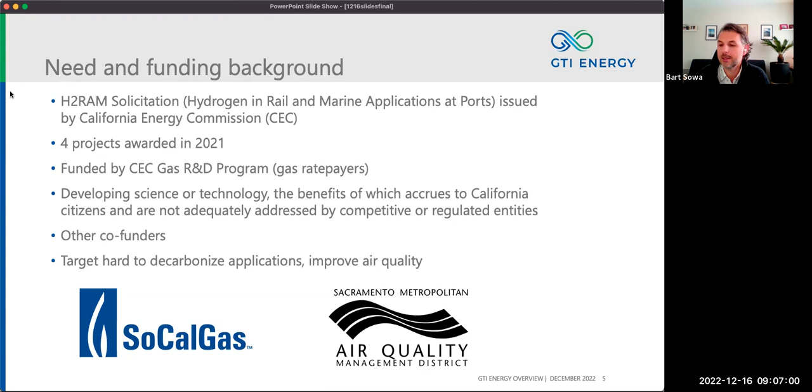As I said, the project was awarded in 2021. We expect to wrap it up in 2025. We have a strong team of experts and partners.

We have Sierra Northern Railway that will be building and operating the locomotive and testing the locomotive. Frontier Energy will be assisting with hydrogen safety and training aspects. UC Riverside will be collecting and analyzing data and life cycle analysis. Valley Vision is coordinating all of the communication and outreach efforts.

Then we have our technology partners: Ballard providing fuel cells, Rail Power Tech providing software controls and electrical system integrations, OptiFuel providing mechanical system and subsystem integrations including energy storage, and Velocity Strategies, who is the fearless project manager here, with Michael Faust representing Velocity Strategies.

Just a quick introduction to GTI, so everybody knows why we're here. GTI Energy is a research and training organization focused on developing, scaling, and deploying energy transition solutions. We leverage the expertise of our scientists, engineers, and partners to deliver innovations needed for low carbon, low cost energy systems. We've been doing this since 1941, working across the whole energy value chain. Our mission is to make energy systems safer, cleaner, more efficient, and more affordable. I think we all want our energy to be just that: cheap, clean, and safe.

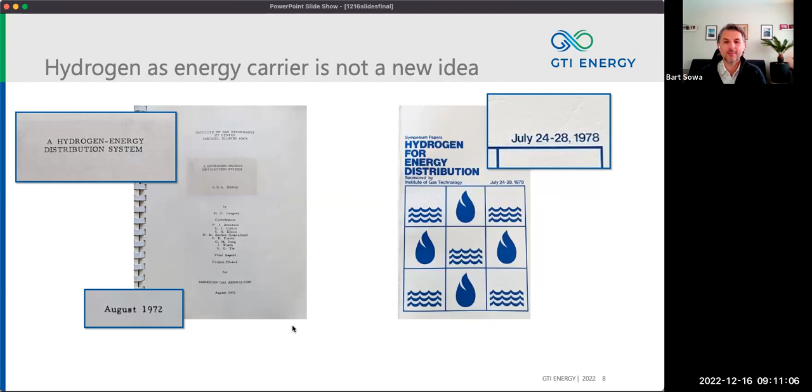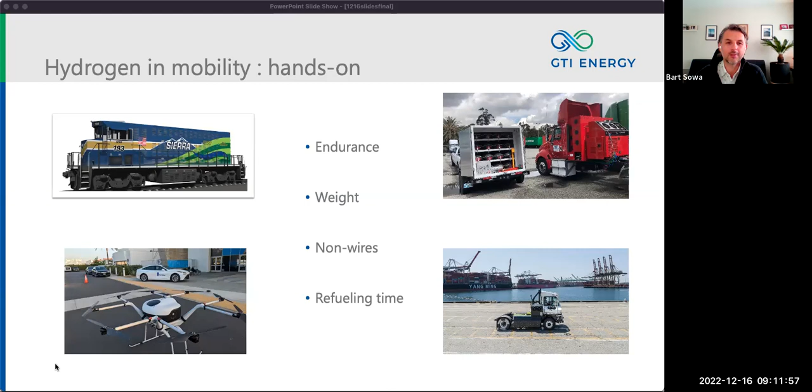That's about as much time as I want to take from the team. Thank you again for joining us. I'll be happy to answer questions at the end of the webinar, and I'll hand it back to Grace.

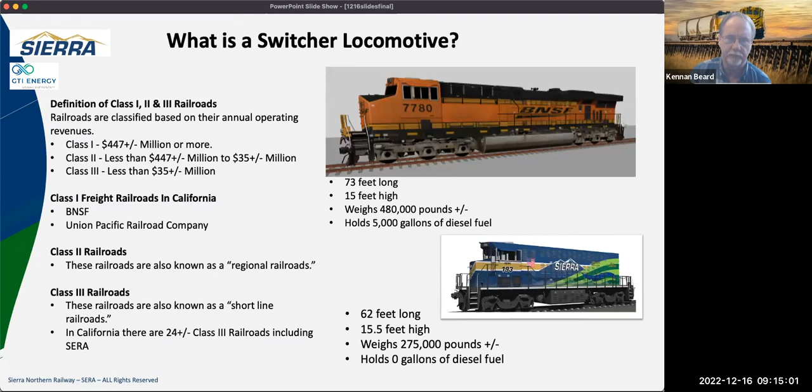As I mentioned, we are a freight operating railroad. The Sierra line has operated in California since 1897. That would be our Oakdale line that operates up to the Gold Country. Short lines are considered to be the first mile/last mile of freight hauling. So again, we don't haul across the country, but we're the ones that serve the direct customers, switching the cars in and out of the transload facilities, the warehouses, the yards.

We at Sierra work in conjunction with 2 Class 1 partners, the BNSF and the UP. I operate 3 railroads right now, one in the Port of West Sacramento, one in Oakdale, and one in Southern California. Between those 3, we have over 41 switcher locomotives in our fleet. They're currently a combination of older technology, EMD type units, as well as gensets, and now we're starting on this new hydrogen hybrid fuel cell locomotive.

The name Sierra Northern was a combination of joining the Sierra Railroad Company and the Yolo Shortline in 2003. So while the Sierra Northern Railway name's only been around since 2003, the Sierra name has been around since 1897. We operate 160 miles of track, well over 160, through the prime industrial and agricultural areas through Central California. If anybody's looking us up, our alphanumeric code is SERA for Sierra Railroad.

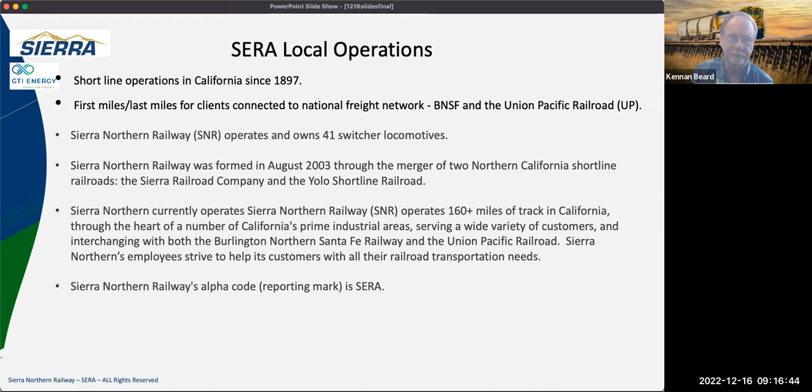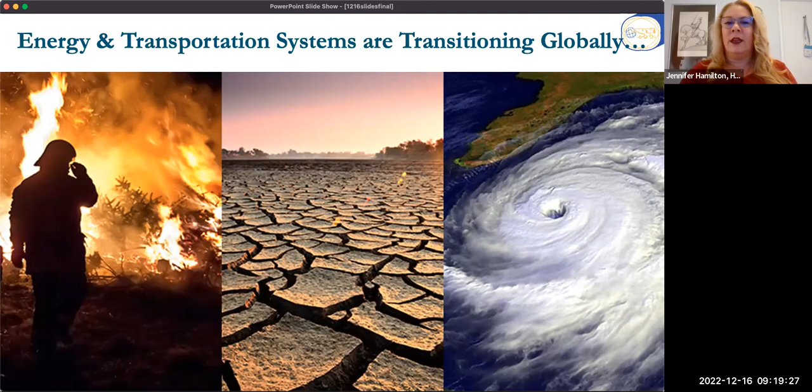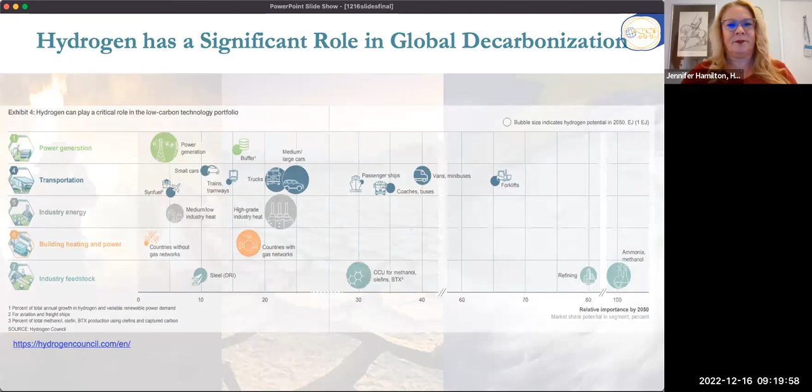In California, hydrogen fuel cell passenger vehicles are available. People are driving them. I do drive a Toyota Mirai myself.

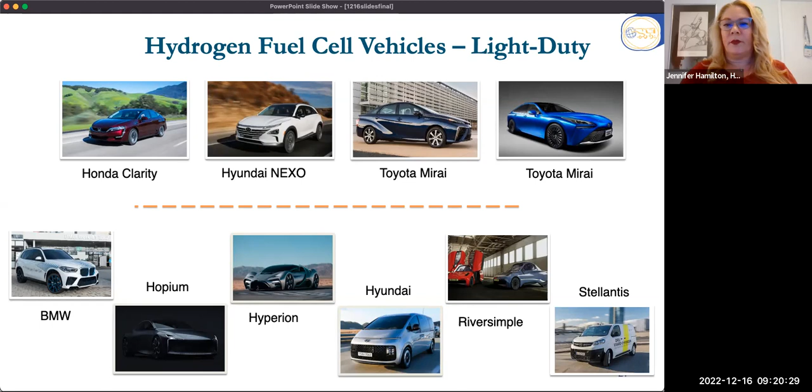So the vehicles across the top are what we see in California. We're currently around 14,500 vehicles in California. A drop in the bucket, but we expect that to grow as we hear the announcements and see new vehicles being announced, and those are the ones pictured below. So we do expect those numbers to keep growing.

In addition, we've also had hydrogen fuel cell transit buses in fleets operating in California for many years, and there's a list of transit agencies who are planning hydrogen fuel cell buses for their fleets. There's a lot of great data in that.

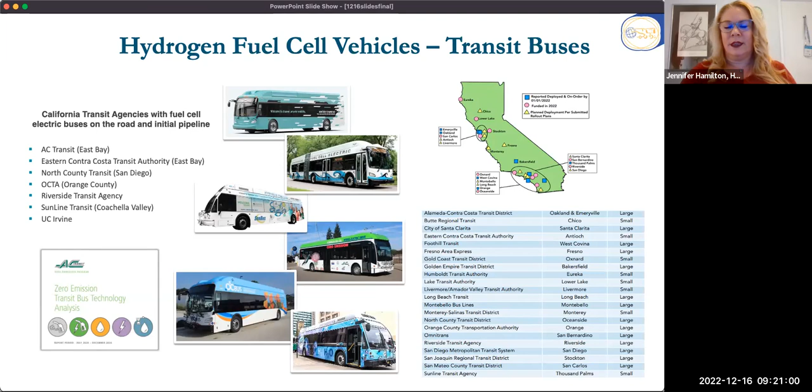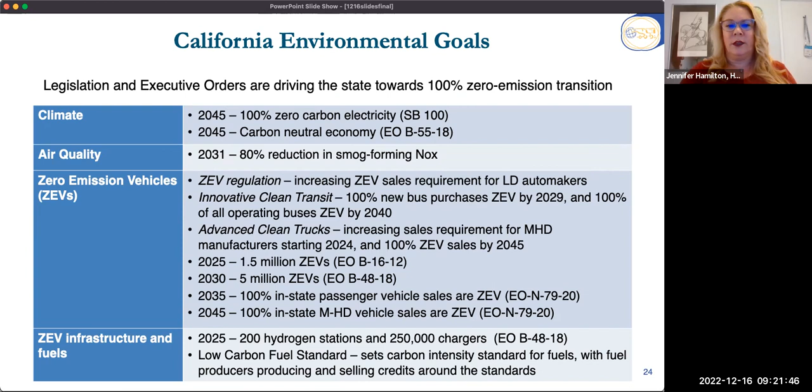In California, we have led the way in emissions reduction and overall air quality. And so in meeting those targets and getting to our 100% zero emissions, we do need to have both hydrogen fuel cell and battery technology. This is really key and is something that our partners at the state agencies also recognize.

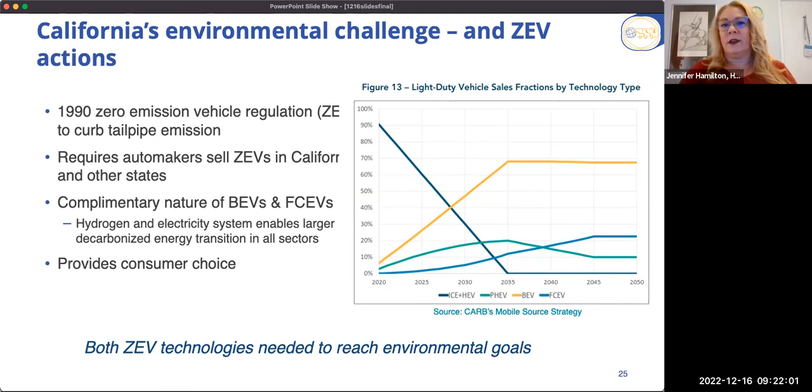We do have a light duty hydrogen fueling market. It is a nascent market, and we are working toward that 200 station goal. The Fuel Cell Partnership did publish a document in 2018 with a target or milestone of 1,000 stations to support upwards of 1 million light duty fuel cell vehicles, which we still want to see. But we are working toward that 200 station goal currently.

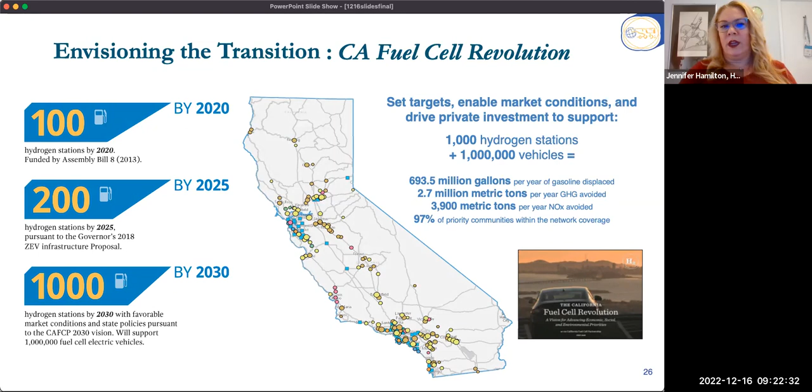Our partners at the state have published a self-sufficiency study, which reports that with relatively a small amount of additional funding, we can reach a point where we are self-sustainable and the market takes over. That's another thing our vision document points out as well, sort of where the market takes over and what we need to get there. Both documents can be found on our website.

More recently, we published a fuel cell truck vision document, which puts out another milestone of 200 stations for 70,000 trucks, but realizing those trucks, as well as trains, don't necessarily stop at the California border. The switch locomotive, of course, is local, but if we're talking about rail applications across the board, those don't stop. So with this heavy duty truck vision, we started thinking more about moving outside the borders of California, and we are working on a mobility plan.

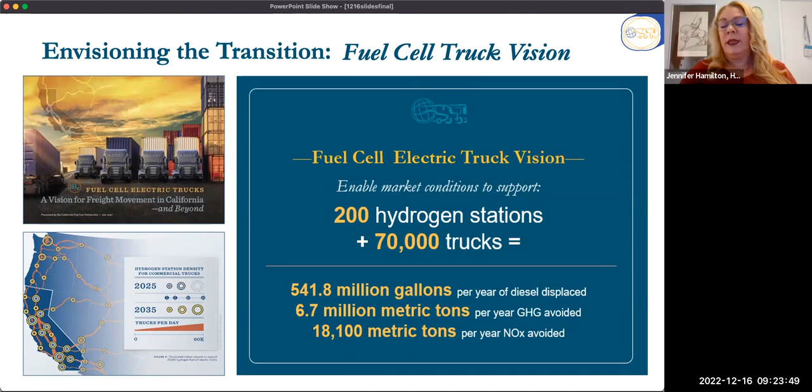This leads into the work we're doing with the ARCHES Consortium, the California Consortium for putting together the California submission for the DOE Hydrogen Hubs submission. Connecting those, our mobility plan would work towards connecting those hubs and really bringing together and uniting around the country based on heavy duty and filling in with the light duty. So that's a quick big picture of all the activity happening in hydrogen. As Bart mentioned, there's so much happening right now and we're really excited.

Let me move on quickly to the next set of slides, and we'll talk a bit about the properties of hydrogen and some high level safety. I realize I'm moving quickly, there's a lot of information to share on these slides, and of course I'm happy to answer any questions.

Hydrogen has been around, as you saw from Bart's slide too, for a lot of years. It's been used in industrial processes for many decades with a pretty good safety record. There's diverse sources of hydrogen as well as diverse applications. As you saw just within transportation, there's a wide variety, but there's also stationary, backup power, all kinds of things. So suffice it to say, there's many ways to make and use hydrogen, and getting towards that carbon-free pathway is what everybody is headed towards.

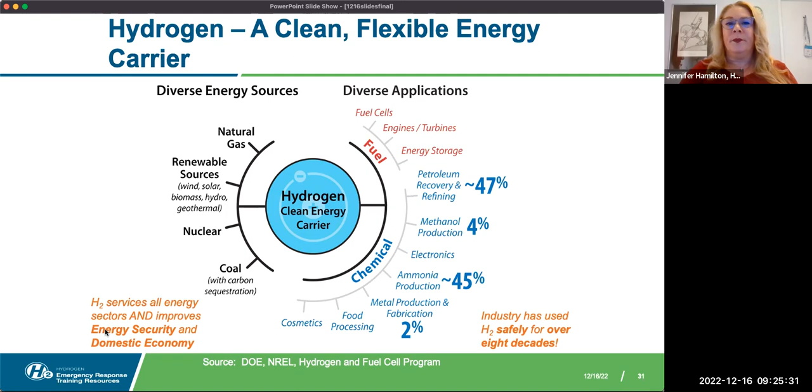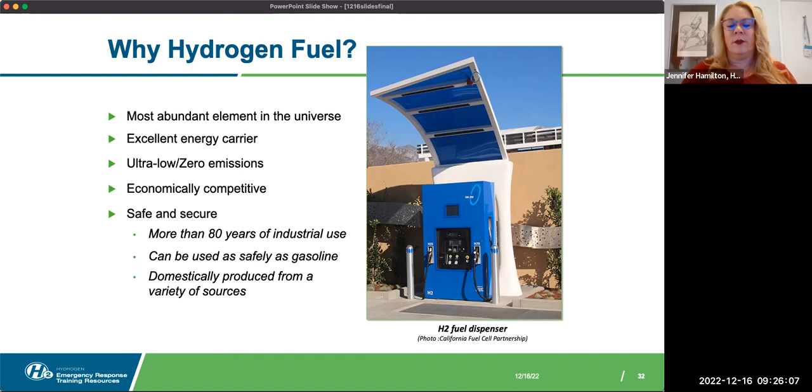So why are we using hydrogen as a fuel? Hydrogen's been around and used for a long time. What's relatively new is putting it into vehicles and using it in the transportation sector. It is an energy carrier, and it is zero emission at the point of use. We'll see in a moment how a fuel cell works. There are advantages to using hydrogen in transportation, getting that zero emission and low carbon, meeting the goals that we need to.

Just a quick list of some of the ways hydrogen has been used historically. Again, what's new is putting it into vehicles. Actually, one of the biggest uses of hydrogen is in refining the fuel we currently use.

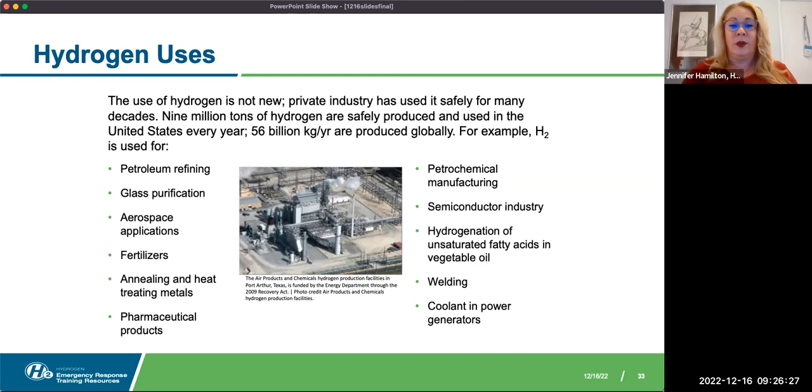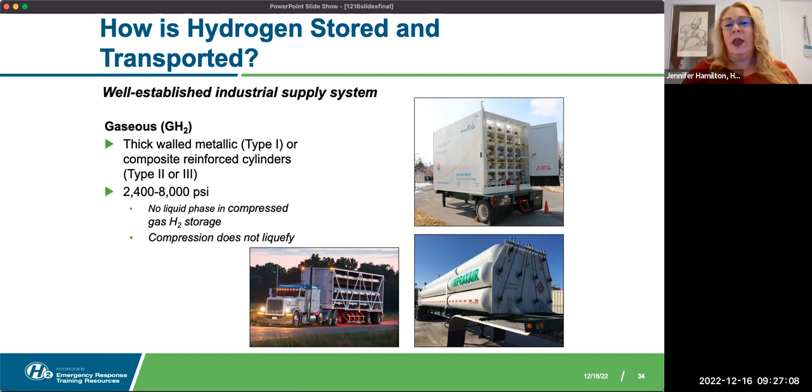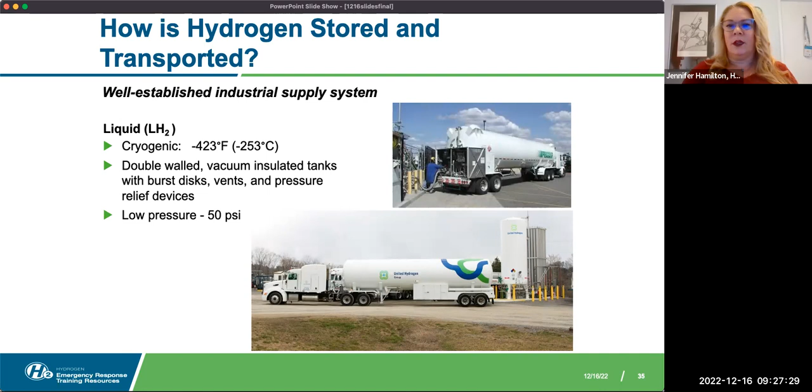It can also be transported as a liquid. It can also be stored as both a gas or a liquid at the point of use at the station. When hydrogen is liquefied, it is a cryogen, meaning it must be at very cold temperatures to be liquid. Again, this is common industrial practice. It's been done for decades.

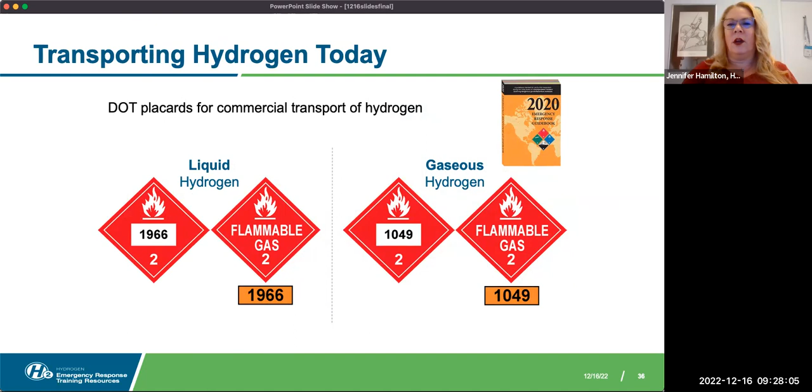Part of my job with the Fuel Cell Partnership historically has been doing outreach and education for our first responder community. We'd like to point out that because hydrogen is an industrial commodity, it has been used for many years. That is included in a standard book reissued every few years from the Department of Transportation, the Emergency Response Guide. This is the placarding found on transport trailers for both liquid and gaseous hydrogen.

Hydrogen exists as a gas at ambient conditions, and it is very light, 14 times lighter than air. For it to be liquid, it has to be brought to very cold temperatures. When we talk about dispensing and selling hydrogen for vehicles, we refer to it by the kilogram, but you can think of a kilogram of hydrogen sort of like a gallon of gasoline, because if you were to burn a gallon of gasoline and a kilogram of hydrogen, you'd get about the same energy output. So we can speak about those interchangeably.

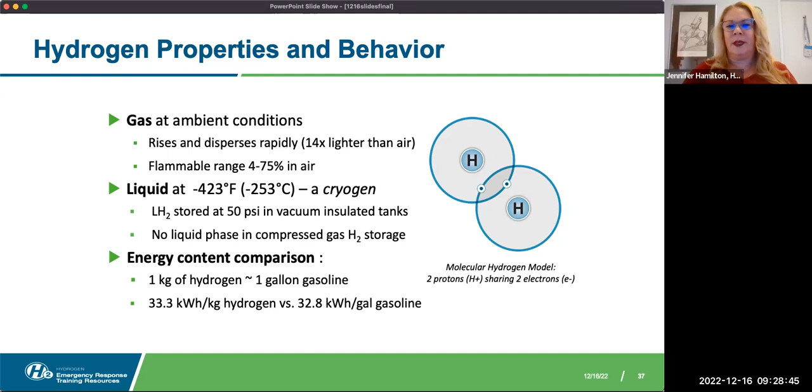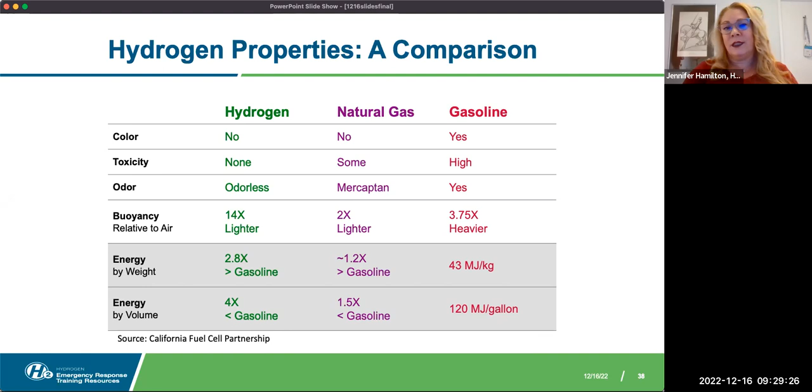Again, hydrogen is much lighter than air, 14 times lighter, which is a bit of an advantage. We don't want it to leak, we want to keep it where it belongs, but if it does leak, its tendency is to rise and dissipate. It's also colorless, odorless, and non-toxic, so we have other methods of detecting hydrogen should there be a leak, at very low levels, so that we can mitigate getting into a potentially dangerous situation. Hydrogen's a fuel, and like other fuels, it has certain properties we need to understand and design systems around so we can use the fuel safely.

We do have safety systems at existing fueling stations. We have around 53 retail stations right now operating in California, with 3 heavy duty stations for heavy duty trucks, and all of them have safety systems, such as everything around the pressure, the high pressure storage, as well as fire and leak detection.

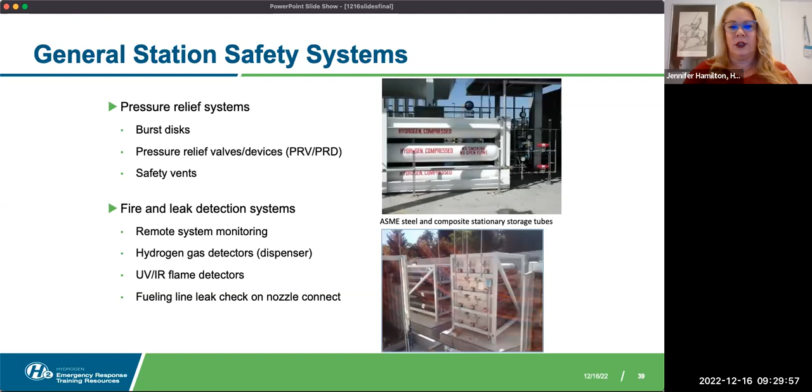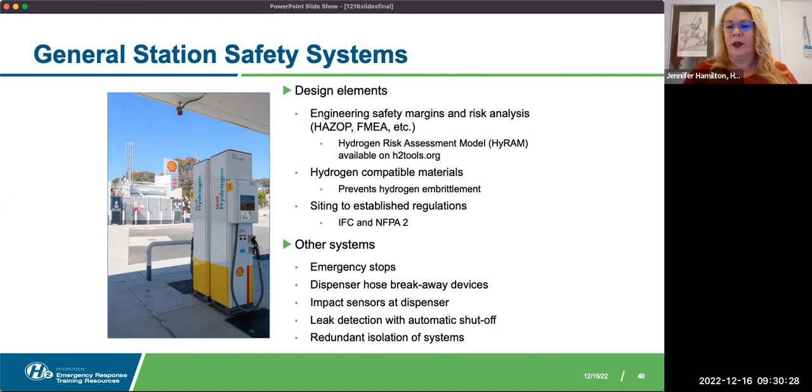These designs go through safety and risk analysis and are sited and installed according to current fire code and NFPA 2, the Hydrogen Technologies Code, which California adopts by reference into the California Fire Code. There are also systems you'd see at any everyday regular gasoline fueling station, such as e-stops and breakaway on the hose.

There's not one way to do a station, although some companies are settling into one design for their company. Hydrogen can be delivered to the station as a liquid or as gaseous hydrogen, as you saw in those slides of the delivery trailers. We also have a station in California that's off an existing refinery pipeline, so there's some existing pipeline, and you could also make hydrogen on site. So there's a little bit of variety in how a station can be designed.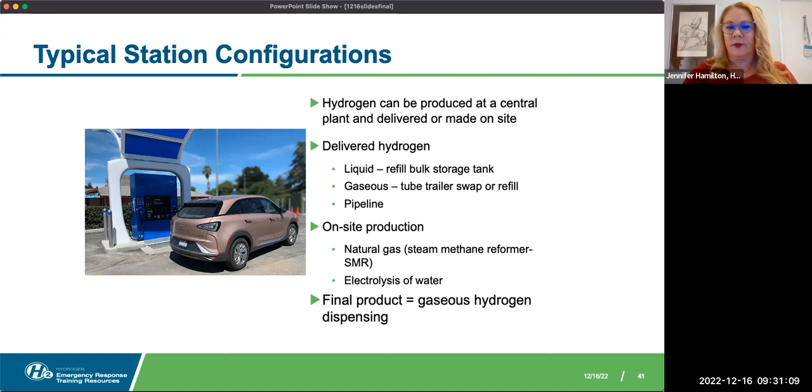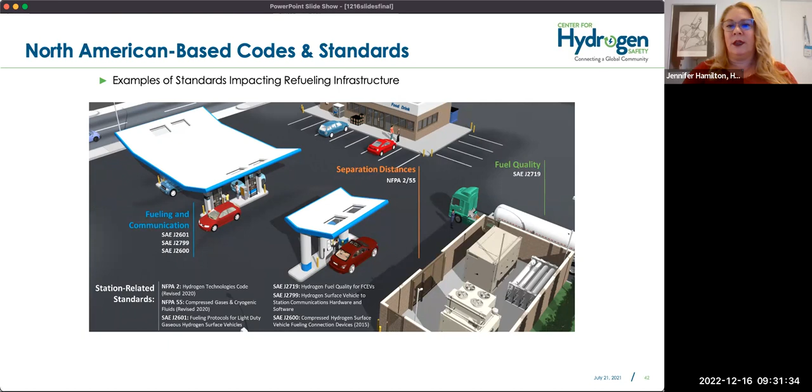Of course, there are applicable safety codes and standards that go into the design and installation of the station, as I mentioned, NFPA 2 for installation, things like fuel quality. We have a standardized fueling protocol for light duty vehicles, and that's being worked on currently for heavy duty, which could be expanded to other heavy duty applications, as well as various component standards around the station equipment and the vehicles.

This is a schematic of a light duty vehicle fueling. The dispenser is similar to what you would see, and so far that hasn't deviated from what I've seen for other applications. Things that might differ are the hardware in the fueling nozzle and connector, and the size of the storage cylinders on board a vehicle, but likely there's going to be a lot of similar components.

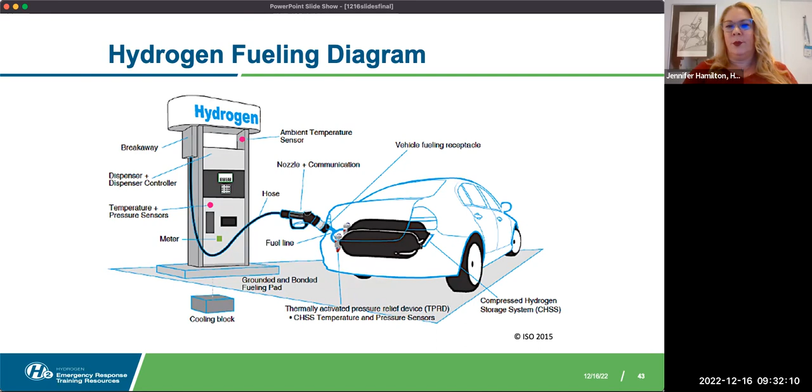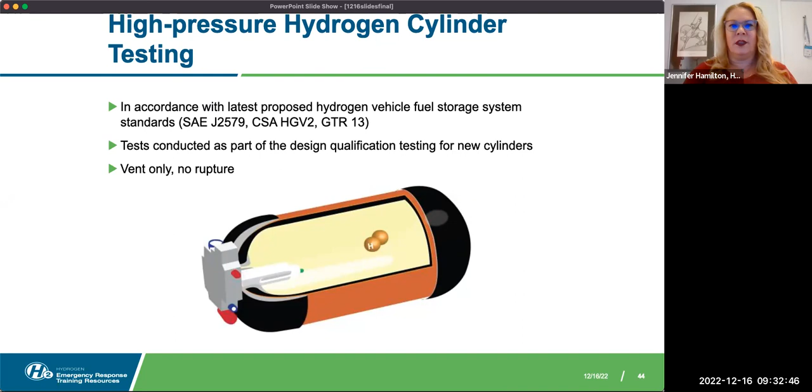Talking about on-vehicle storage, these are cylinders that are designed, manufactured, and tested to existing safety standards. They go through testing and receive a lifetime approval, usually in the 15 to 20 year range currently, and that's very rigorous testing. I sit on the codes and standards committees that develop these, and I can attest to the amount of thought, engineering, and resources that go into these codes and standards.

So quickly, what is the vehicle doing, regardless of what it is, with the hydrogen that gets put on board? It is using the hydrogen from those storage cylinders in a fuel cell stack. This is an example of a single fuel cell, composed of a positive and a negative electrode, with a membrane in between that will catalyze the separation of the hydrogen molecule into protons and electrons. The electrons generate the electrical current that powers the vehicle, and excess current gets put into the battery.

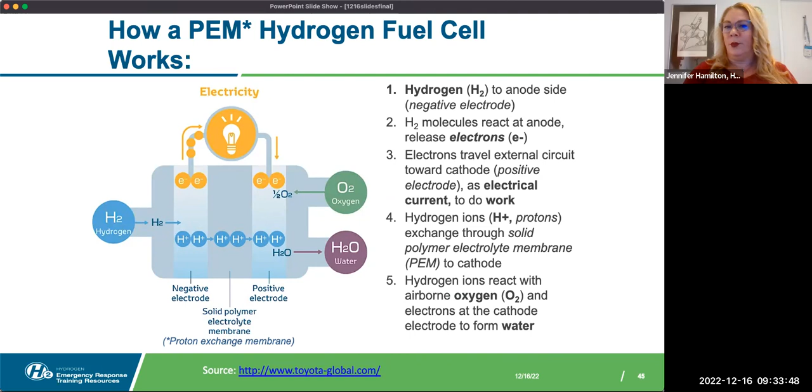The outcome of that electrochemical reaction is that the oxygen from the air used in the reaction and the hydrogen used from the onboard storage cylinders come back together on the other side, forming water as the byproduct. So again, zero emissions out the tailpipe. So that's the quick and dirty version.

Again, I'm open to questions. There's more information on these slides than I covered, but I want to give you some resources.

Of course, our website, h2fcp.org, has our station map and FAQs. You can see by the numbers where we are with vehicles and stations in California. And then the Center for Hydrogen Safety, of which we're a strategic partner, houses the hydrogen tools resource, as well as resources for first responders and others, lessons learned, best practices, and so forth.

And I think that's all I have for you. Thank you.

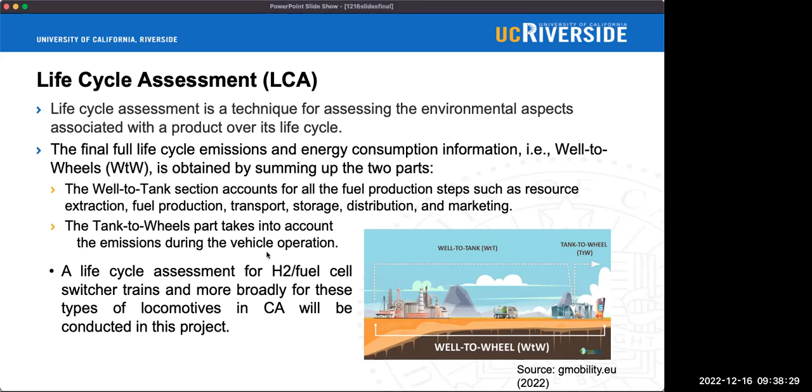So since this is a California-centric project, we will implement the California greenhouse gases, regulated emissions, and energy use in transportation, or GREET model. The GREET model, developed many years ago by Argonne National Lab, is a tool that examines the life cycle impacts of vehicle technologies, fuels, other types of products, and energy systems, and it's widely used across the US.

Essentially, for any given energy and vehicle system, GREET can calculate total energy consumption, emissions of air pollutants, greenhouse gases, and water consumption. So we will be using the California GREET version 3.0 model, which is the latest version, released in 2018, and is used to generate the carbon intensities of all different fuel pathways.

For the purpose of this work, the well-to-tank analysis will be focusing on the hydrogen production methods and distribution, while the tank-to-wheels analysis will be using locomotive activity data that will be collected by UCR, such as data related to the locomotive operation and mileage traveled, etc.

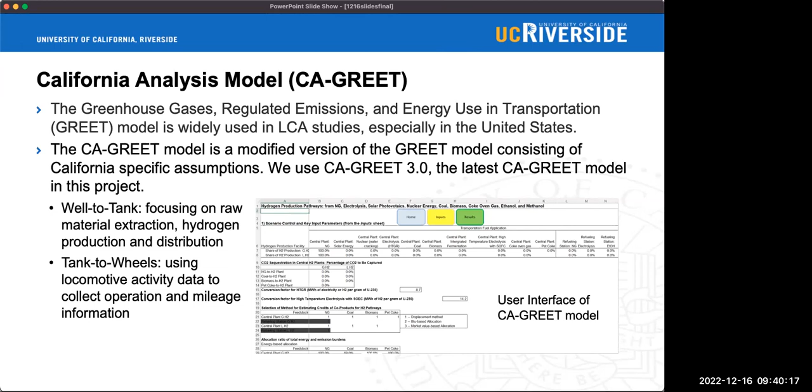This, I think I have one more. That might be all the slides that we have. Oh, okay, I had one more, but it's fine. It's fine. Thank you so much. Thank you.

All right, well now I will head over and talk about the public health impacts and improvements of hydrogen. So you all heard the various applications for hydrogen, and I'm excited to share more about the public health improvements that are going to be happening as a result of this project.

So what is diesel exhaust? Diesel exhaust is made up of particulate matter and various gases, and actually includes over 40 substances that are listed by the US EPA as harmful and hazardous air pollutants. We're excited that this project will be replacing 10,000 gallons of fuel that are used each year to run this switcher locomotive.

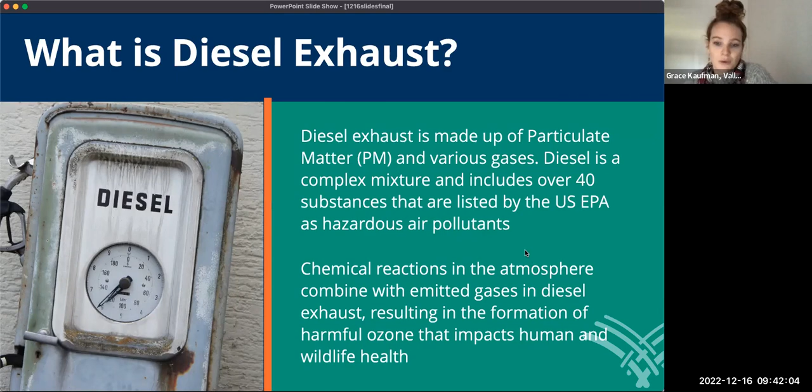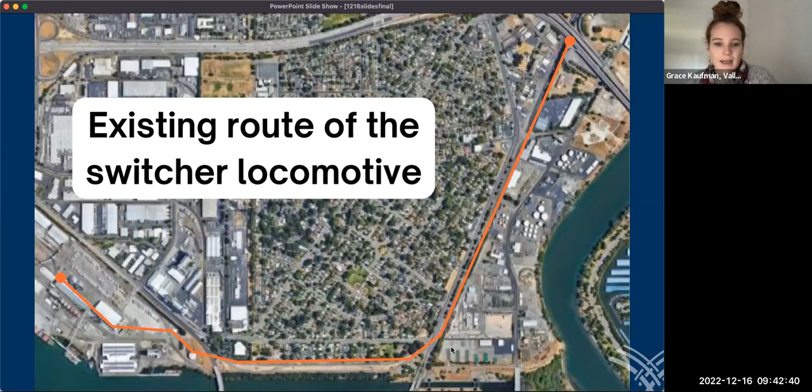As part of Valley Vision's role, we did community engagement in this neighborhood and went door to door to let all the folks know the good news, that the train that's behind their house is now going to be much cleaner and quieter for them. So they were all very excited. Didn't hear any negative feedback there.

So again, the impact to the surrounding community will be an immediate improvement to the air quality, reduction of greenhouse gases, noise, odor, and then a long-term reduction of ozone levels that are again generated by that diesel exhaust.

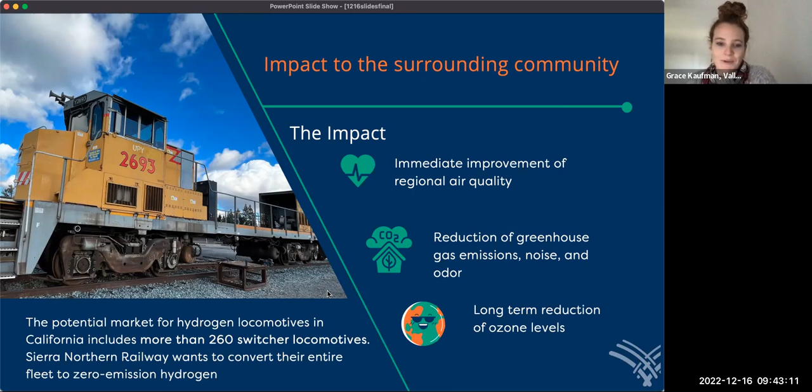So the potential market for hydrogen locomotives in California includes more than 260 switchers, and Sierra Northern Railway wants to convert their entire fleet to zero-emission hydrogen. So we're very excited about that, and I wanted to be short and sweet so that we would have enough time for Q&A, because I know we have several questions.